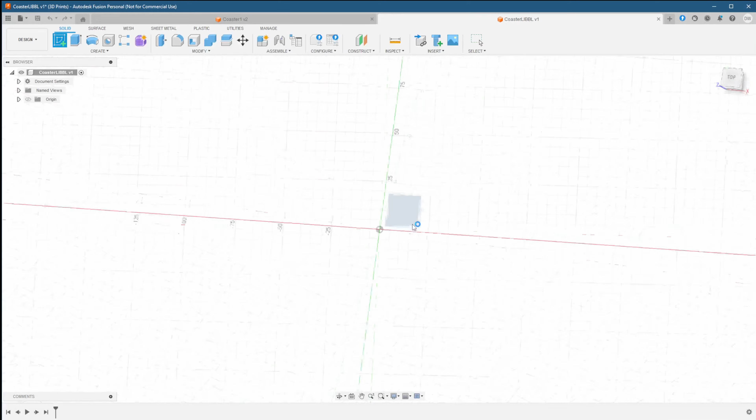Now that we're in Fusion 360, we'll do what we always do, which is save our project first. This makes it easier and more intuitive to save as we go along in building our model. After saving the project, let's create our sketch on the top plane and begin by creating a center diameter circle. We want to put this on the origin and make it 90 millimeters wide. Now let's create a border around it. Click offset and make it 3 millimeters. After that, we can import our SVG. Once it's in, we'll resize it and center it to the circle.

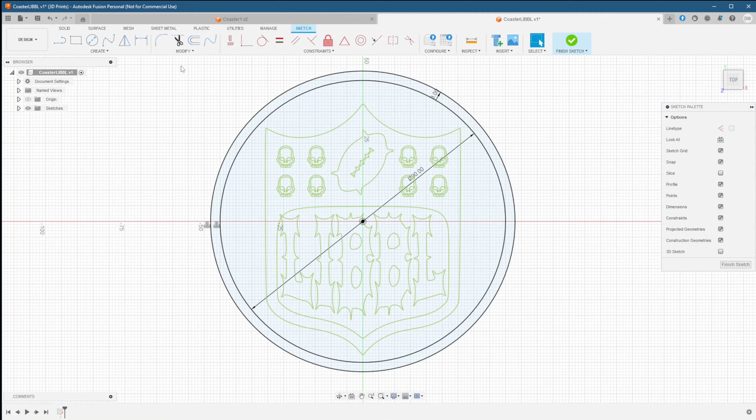From here, we'll do our usual extrusions. We'll change things up a bit this time around, and we're going to create components instead of bodies. I don't recall the reason why I started to use bodies instead of components, but after a commenter suggested I use them, I could not think of a reason why I changed. So we're going to extrude things by the color that they will ultimately be printed in, and we're going to create components from the extrusion menu.

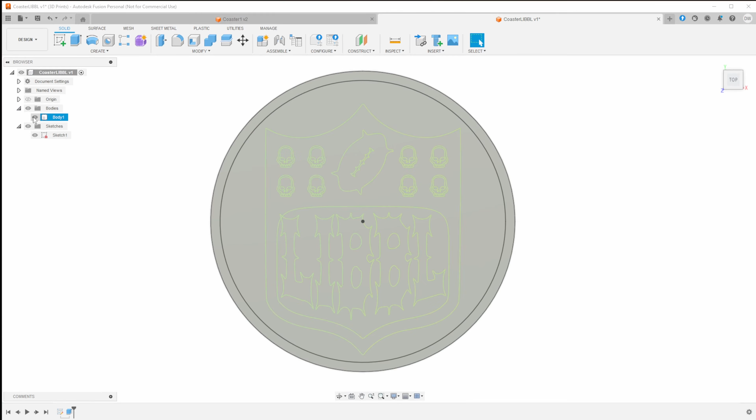Let's select all and extrude it to -3 millimeters. We'll have a solid color base and the design will be on top. This will allow us to print the design face down on the print plate, giving us a more detailed and higher quality print. The solid base will also cut down on the number of color changes and wasted filament. It's a win-win for us. We'll extrude each feature according to color and create a new component for each. When we bring this into Bambu Studio, it will be grouped into parts that we can easily assign color to. We'll speed through this and get to the next phase, the fun stuff.

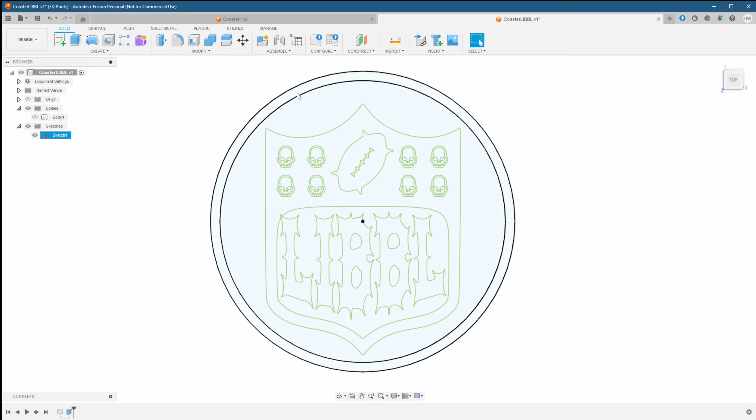We'll extrude all the top pieces by 2 millimeters upwards. This will give us enough layers on the top to have enough color to appear solid and not have the dark bottom color show through. Remember to choose New Component in the drop-down and select all the items grouped by color.

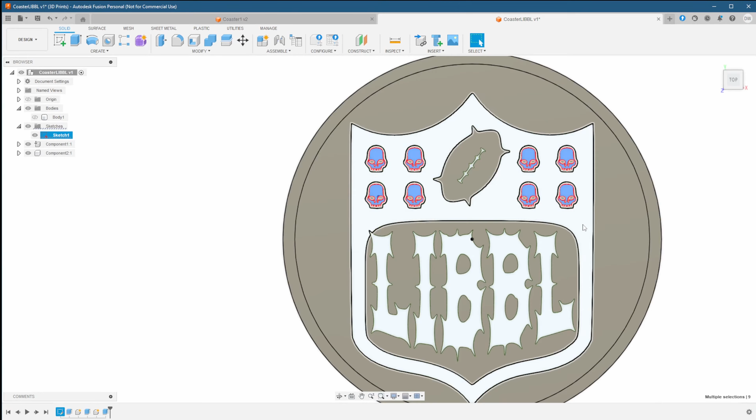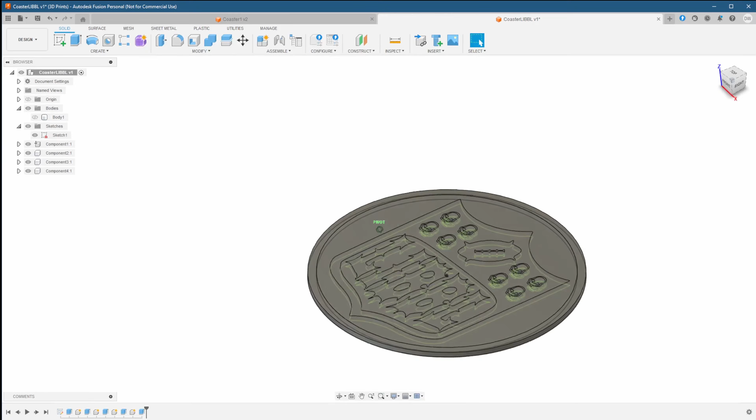Be sure to get all the pieces. Sometimes due to the way the vector art is made or generated, some pieces overlap each other, and when importing, it creates multiple parts for what may have been a single object. So select all of them together, and when you extrude, it will become one again. Let's take a look at our model from all around and make sure that we got all the pieces we needed to extrude. It's looking good, so now we can move on to the cool part of the video. At least, I think it's the cool part.

I got these NFC stickers from Amazon, and we're going to program them to hit the website for the Blood Bowl League. Obviously, you can customize these in a ton of different ways, like going to your social media accounts or a particular product page in your store. Let's go ahead and program one to see how it's done. I picked up an NFC writing tool from the App Store, but there's many. Just find one that you like.

Just for this test, I'll have the tag go to my YouTube channel, where you can find other videos of the same questionable quality as this one. All we need to do is add a record, in this case a URL, and I'll paste in a link to the channel page. Then it's just a matter of tapping write. Then bring your phone close to the tag, and that's it. It's programmed in.

Let's test it out to see how it works. On an Android phone, it goes straight into the website. On an iPhone, it will bring up a notification to allow you to follow the link. No matter how old this technology might be, it's still pretty cool that you can program a sticker to send you some data. Now, we need to see how we can incorporate this into our coaster.

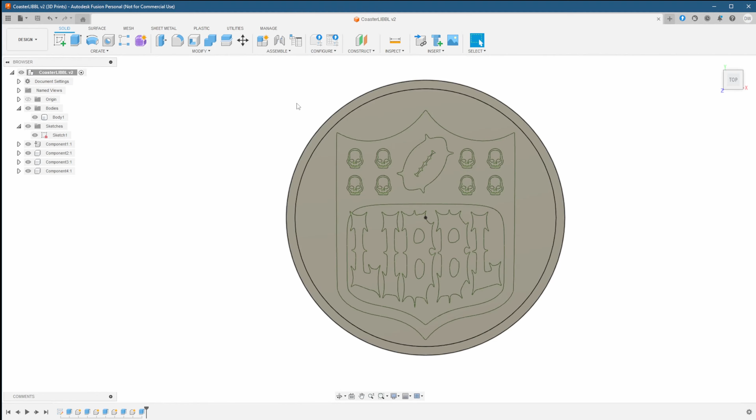We're back in Fusion, and what we want to do here is attach the sticker to the coaster. But it wouldn't look very good just having a white sticker just sitting on the top covering our design. So what we're going to do is empty out a slit inside of the model itself. The idea is that we're going to add our stickers to the coasters while we print. So let's begin by adding an offset plane.

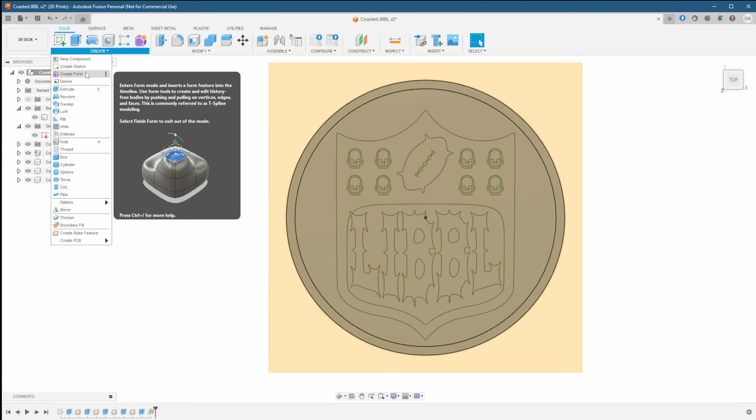An offset plane is exactly what it's named, a new plane that gets placed relative to some part of your model or existing coordinate plane. In our case, we want our offset plane to be -1 mm from the top of the coaster. So when placing our plane, we want to select the top face of the coaster. Then we'll create a center diameter circle.

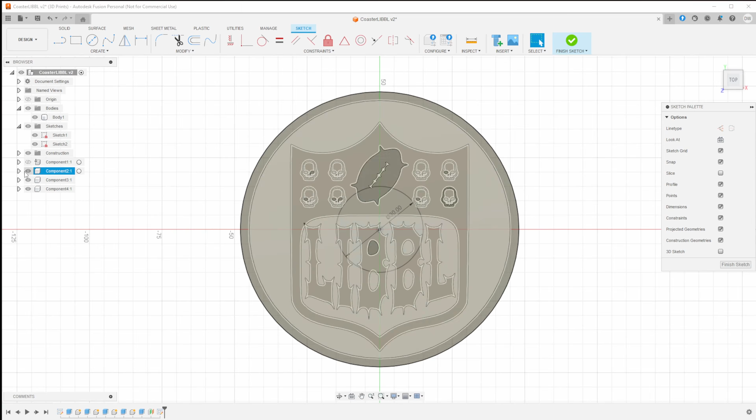Our stickers are about 25 mm, so we're going to make our circle 30 mm wide to give us a bit of room. Then we'll extrude that by -1.5 mm, which will now go inwards. And we'll leave the operation as a cut, which will carve out this circle from the main body. This is big enough for our sticker and small enough not to cause any issues when printing.

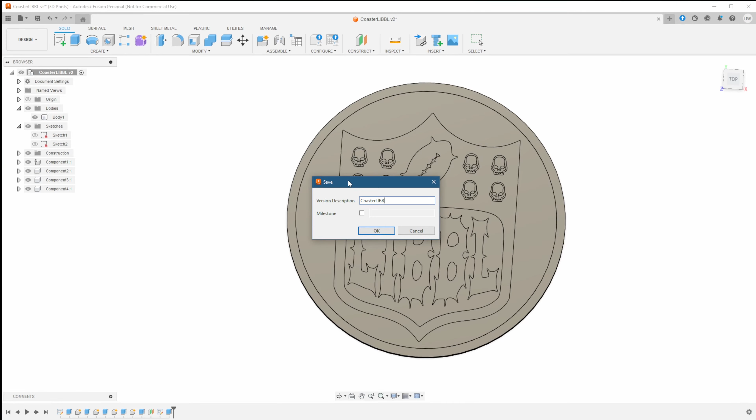You may have to hide some things to select the new disk we created, but after making the cut operation, we should have ourselves a slot inside of the coaster that we can place our NFC tag into. Now let's go to Bambu Studio and finalize our design.

Here we are in Bambu Studio, and we're going to go ahead and import our model. Once it's successfully loaded, we should see all the separate parts listed as components in the objects list. I could have renamed them in Fusion, and I would do so if I was releasing this model to the world, but since it's for personal use and a small number of parts, I just don't bother.

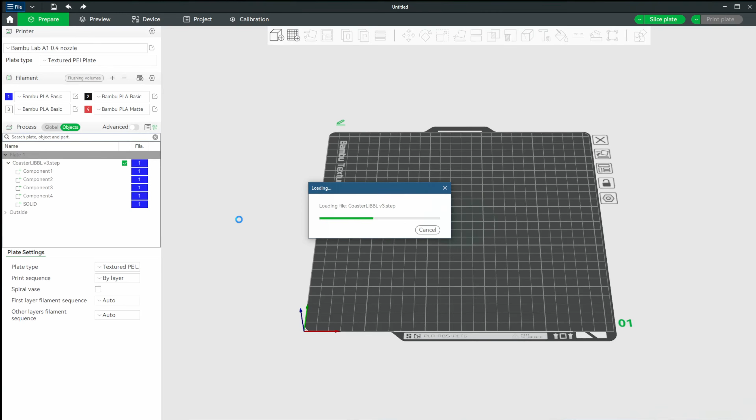Now that everything is in, it's just a matter of assigning colors. Right now, all I'm doing is using the shortcuts for the colors. As you can see on the filaments list, each color is in a numbered slot. If you press the number on your keyboard, it will switch the currently selected part to that filament color. It's a fast way to assign colors to parts.

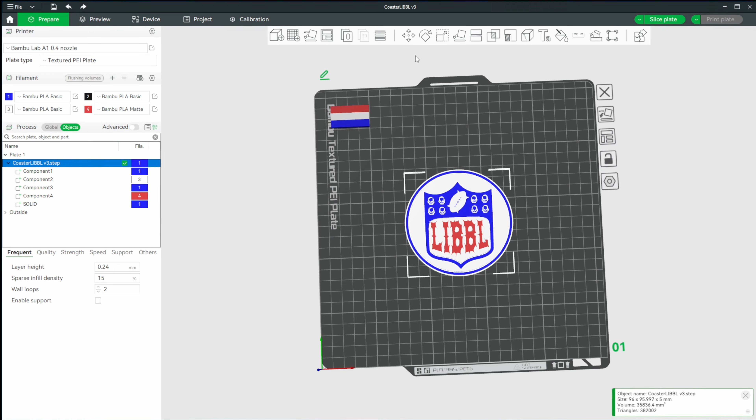After all the colors have been assigned, we want to flip the model onto its face, so that the top part with the design is on the print plate. That's the side we want the nicest, and on the textured plate that I'm using, it will have that nice feel too. While it's still a bit slick, the textured surface does provide a bit of friction for things sitting on top, which is what we want in a coaster.

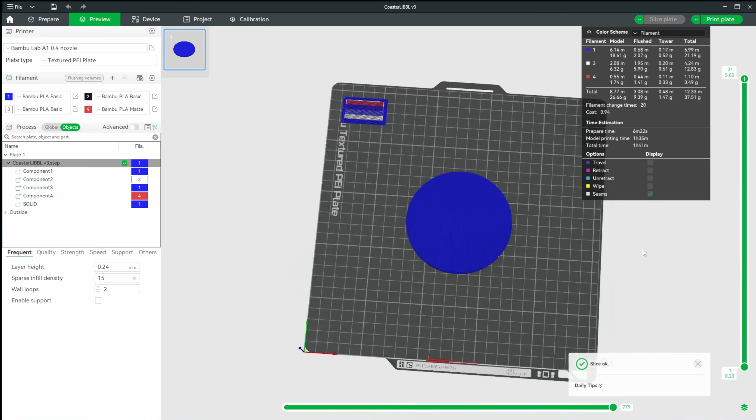We need to slice our plate, and this is the key part. We need to find the layer that will cover the hole that we made in our model, and put a pause on the layer before that. So we want the print to stop and wait for us to tell the printer to resume. That will allow us to put the sticker onto the slot we created.

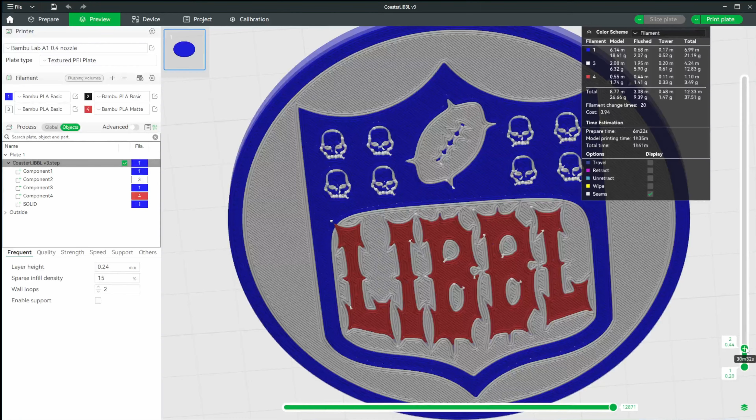One thing to note is that the layer depends on what quality you're printing at. So if you're going to change your layer height, you need to recheck which layer you want the pause to happen in. You can see here how that's going to work, and the hole where we're going to be putting in the NFC sticker.

The way you set up a pause in Bambu Studio is you find which layer you want the pause to occur, then right-click on the green plus layer button and choose Add Pause. You can see now that there's an indicator on our timeline.

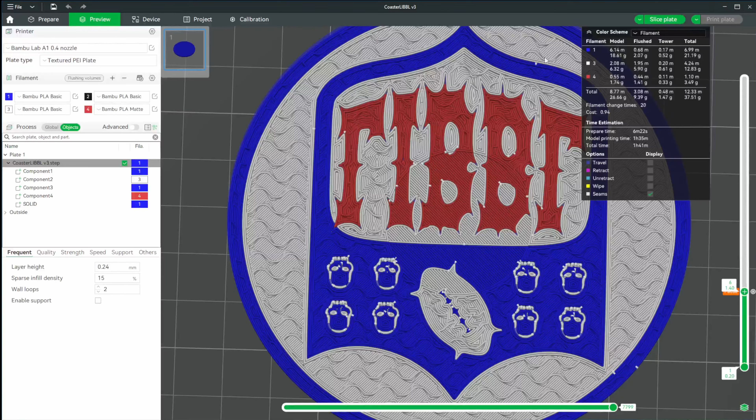To show you what I mean here about changing the layer and checking after you change the quality, I'm going to change the quality here to something better, and also change the wall generator to Arachne. I'm also changing the minimum feature size to 15%, since I want to make sure I don't lose too much detail on those skulls that are in the design.

After a reslice, we check to make sure our pause is in the right place, and we're ready to print. Let's go ahead and do that, and I'll see you in a bit.

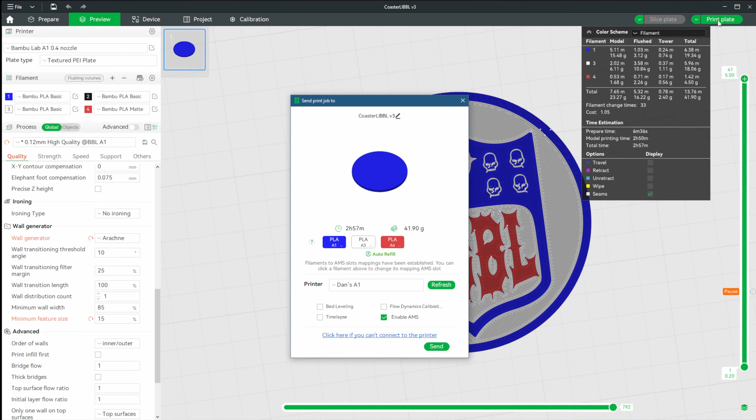So here we are in the print, and the printer just paused and beeped, letting me know that it's time for me to put the NFC sticker in. So let's unpeel it from its backing, locate the round area where it belongs, and stick it well in there. After that, we're going to go ahead and resume the print. The print will then continue and cover that NFC sticker as if nothing changed.